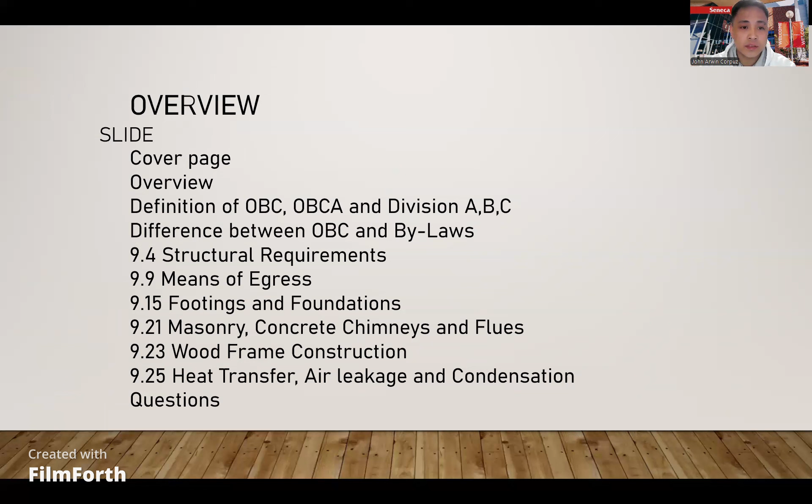The definition of Ontario Building Code and Ontario Building Code Act and Division ABC. The Ontario Building Code is a regulation under the Ontario Building Code Act that establishes the minimum standard for the construction, renovation, and maintenance of buildings in the province of Ontario, Canada. It covers various aspects of safety, health, accessibility, fire protection, structural integrity, energy efficiency, and environmental sustainability.

The Ontario Building Code Act serves as the legal foundation for regulating the construction, renovation, and upkeep of buildings in Ontario. It grants authority for the Ontario Building Code and defines the duties and responsibilities of municipalities, building officials, and other involved parties to ensure adherence to the code.

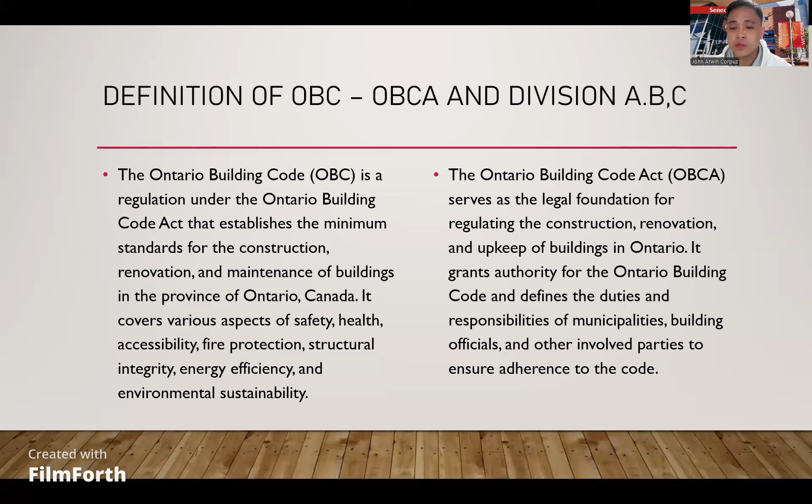The difference of OBC and bylaws. Ontario Building Code: it is a provincial regulation under the OBCA, or what we call the Ontario Building Code Act. It establishes minimum standards for building safety, health, accessibility, structural integrity, and environmental efficiency. It also focuses on how buildings are constructed and maintained to meet safety and technical requirements.

For bylaws, these are local laws enacted by individual municipalities. They regulate matters such as zoning, land use, property maintenance, and site specific requirements. They also focus on where and what can be built, ensuring development aligns with local priorities and community plans. These are the differences between the Ontario Building Code and bylaws.

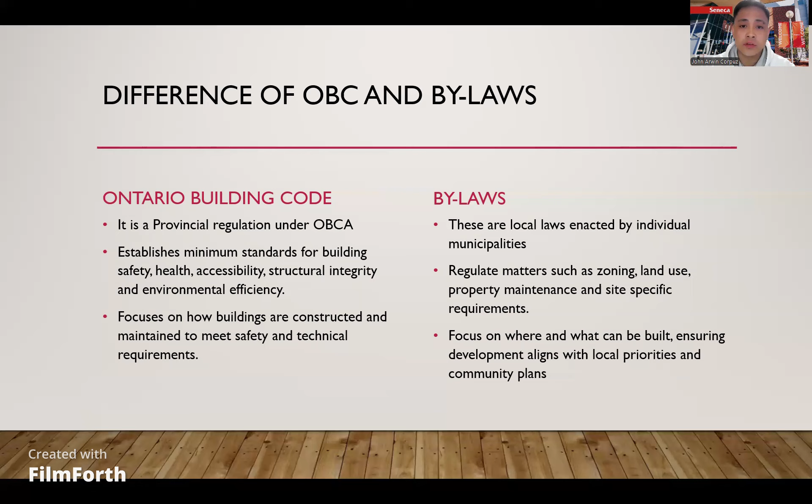Here we have Part 9.4, structural requirements. Part 9.4.2.3, platforms subject to snow load and occupancy load. As you can see here, we have a balcony. This balcony is subjected to snow load and occupancy load.

Article 9.4.2.3 of the Ontario Building Code specifies that balconies, decks, and other accessible exterior platforms intended for occupancy and subject to snow loads must be designed to support either the specified roof snow load or a minimum of 1.9 kilopascals, whichever is greater. This requirement ensures the structural safety of platforms, particularly in areas prone to heavy snowfall. Here in Ontario, we are very prone to heavy snowfall, so we should always consider the snow load, especially when building exterior decks.

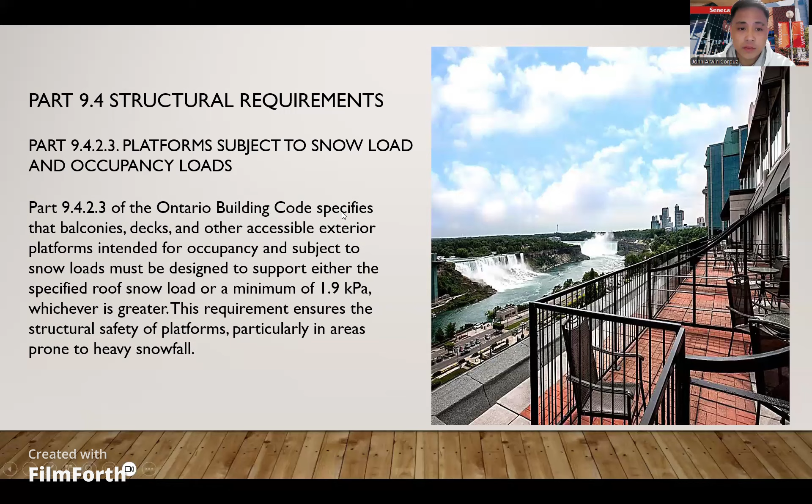Next is Part 9.9, means of egress. This is the application, 9.9.1.1. Stairways, handrails, and guards in the means of egress shall conform to the requirements in Section 9.8, as well as the requirements in this section.

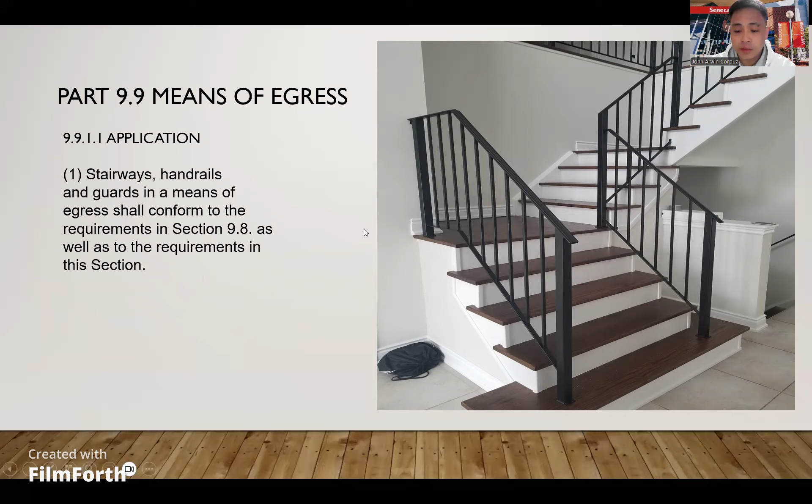We also have 9.15, footings and foundations. This is very important in starting a construction. 9.15.3.1, footings required. Number 1, intent statement: footings shall be provided under walls, pilasters, columns, piers, fireplaces, and chimneys that bear on soil or rock, except that footings may be omitted under piers or monolithic concrete walls if the safe load-bearing capacity of the soil or rock is not exceeded.

We have here the diagram. You can see here a cylindrical column with a foundation, and this is a rectangular column, also with a foundation.

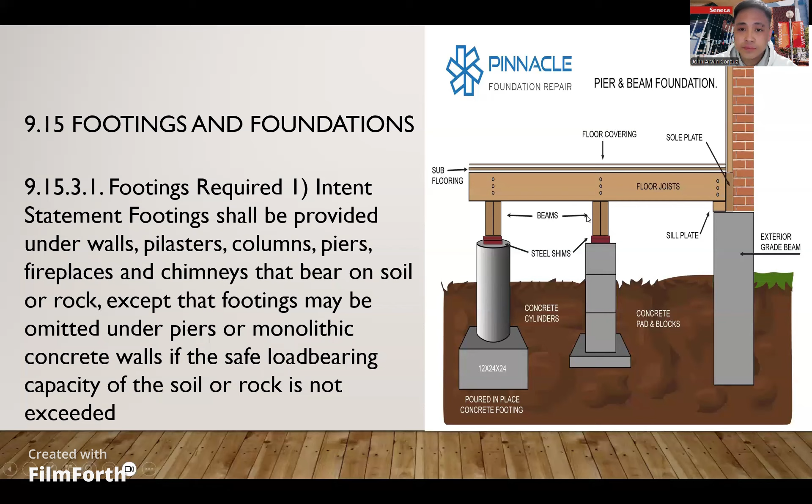9.21, masonry and concrete chimneys and flues. It says here, a chimney flue that serves a fireplace or incinerator shall not serve any other appliance. A chimney flue that serves a solid fuel burning appliance shall not be connected to a natural gas or propane fired appliance.

We have here a diagram for a chimney. Chimney chase, this is the damper, flue system, and smoke chamber. Yeah, this is what we see inside the house. This is the firebox.